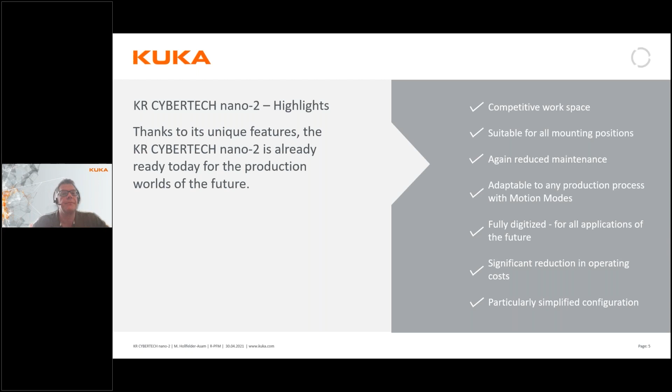One of the first improvements with the CYBERTECH nano is the fact that it is now possible to mount it in any position, not only on the floor, wall, or roof, but also in an inclined position. That means basically you can mount it at any angle you want, all with the same robot type. It's just a software setting. You mount it and tell it at what position it is mounted, and it will compensate its movement and its lubrication for that position automatically.

There is also a new power system on board. That means for the external cabling up to the tool, there's a completely new K-PIPE with much more options than we had before, in terms of what type of cabling you need into your tool. And those are deliverable directly from us and included in the warranty of the robot, of course. So that is also a big improvement.

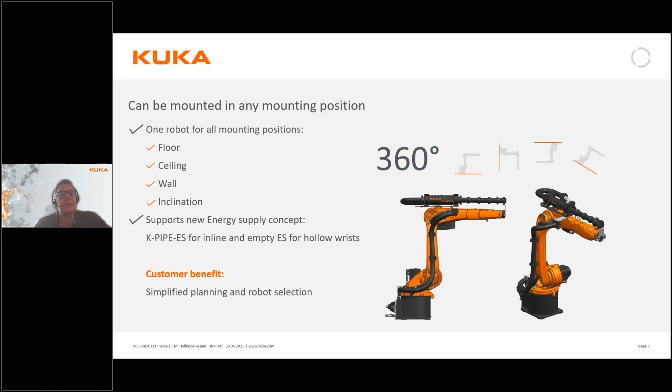Now, if we look at the CYBERTECH nano, there are 3 models. For those of you who know the KUKA robot range, you know that KR stands for KUKA robot. If we take the first one here, for example the 10, that means that the payload of the robot is 10 kilos, and we have a reach of 1440 millimeters. The Dash 2 is, of course, the second generation of the CYBERTECH robots.

In the basic range of the CYBERTECH nano robots, there are 3 robots available: the 10 kilos, the 8 kilos with the 1640 millimeter range, and finally the 6 kilos with an even longer range, a 1840 millimeter range.

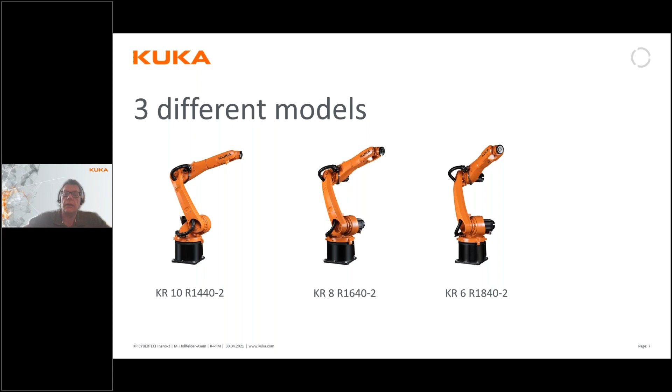The protection class of these robots is quite good. They are completely waterproof as a standard. The axis near the tools are IP67, which means that you can wash it off with high pressure water. The complete robot is IP65, which means that it's dust and waterproof. And the operating temperature that it's allowed to operate in has been widened quite a lot, going all the way from 0 degrees, meaning it can work in a cooled room, up to 55 degrees plus, which is quite a big range in terms of temperature here.

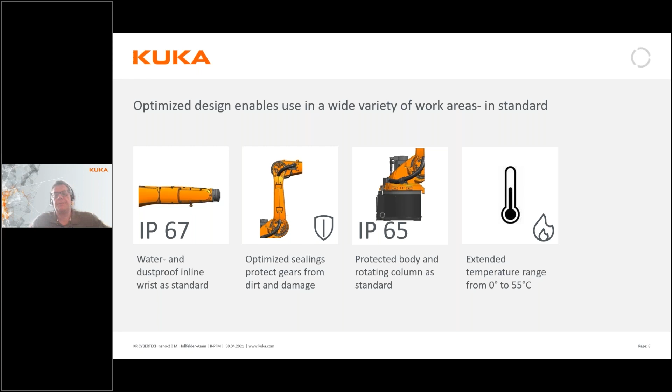Now, if we look at all these changes a little bit more in detail, we can see that the changes consist of a reduced contour around axis 2 and 3, meaning it's a bit slimmer than before and can get into tighter spaces. Optimized robot design is a very generic statement, but what it actually means is that we have been able to construct this robot out of fewer parts, meaning there are fewer spare parts needed and required for this.

The Axis 1 gearbox has been updated. There are already from the start forklift pockets for when you move the robot into position. We have again slimmed the footprint of the robot, so it takes as small a space as possible. The inline wrist solution up near the working flange is optimized for this K-pipe energy system for the cabling out to the tool you might have, and we use the same K-pipe solution as for all our robots here.

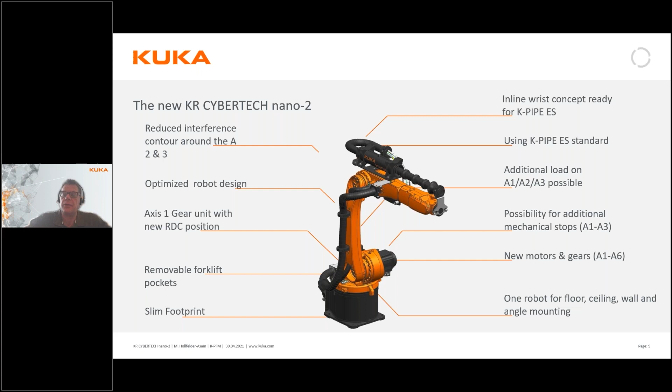Now, if we look a bit more specifically at this, what does that mean? Well, I mentioned we have already changed all the motors and gearboxes. That actually gives us increased axis speed on all axes and increased acceleration and retardation. That means the robot is now even more dynamic and we can reduce our cycle times using this.

This is all emphasized and even more visible because the weight of the total robot has gone down. That means also that we get a better path and point accuracy in the robot compared to before.

And the new drives and gearboxes also allow us to optimize the energy consumption of the robot. That means that we can bring down the cost of operation in terms of energy. And finally, as I mentioned, it is a lot slimmer than before.

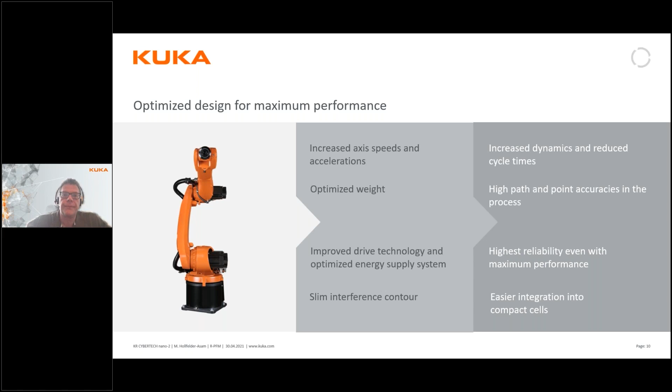The best way of seeing this is having a look at the working space of the robot. You see, it's a very small area which it can't reach very close to itself. It can even reach under itself, which means there is no need for a special console version of this robot. It can actually reach spaces under its own foot if it's sitting on a console.

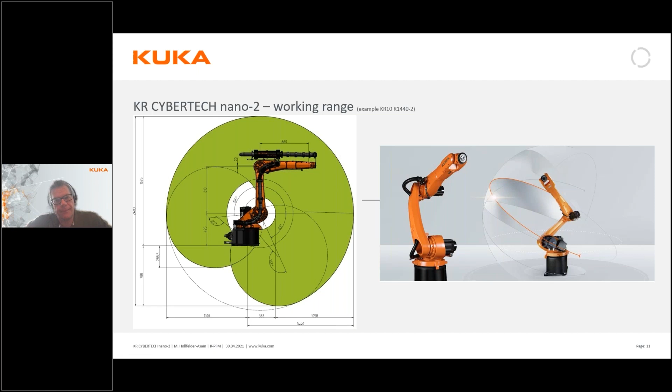I also mentioned a little bit about how in the older days we had special variants of our robots. One could be a path-accurate robot and one could be a high-speed robot. This has been taken away and is now totally controlled through the software instead, where you can choose your mode of the robot.

In the basic variant, it's called performance mode, which is the standard mode. But you can software-wise switch it to a path mode, which makes the robot travel a little bit more path accurate than it would in its normal mode. That would be typically practical when you're doing a path that requires high precision, for example a gluing or a welding path.

And on the other end of the scale, there is a dynamic mode, which actually is a high-speed mode, typically used when you want to reduce your cycle time. There's a bottleneck in the robot movement, for example.

And to emphasize this, I've brought into the webinar a small movie, which I will now show you. This movie might pop up in a separate window on your site. So if you don't see the video immediately, check if there's a separate window with the video popping up.

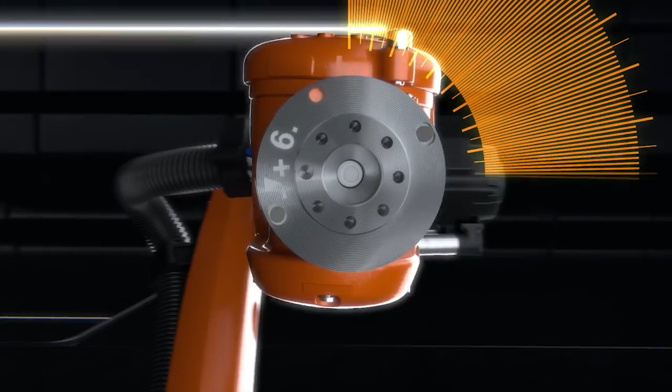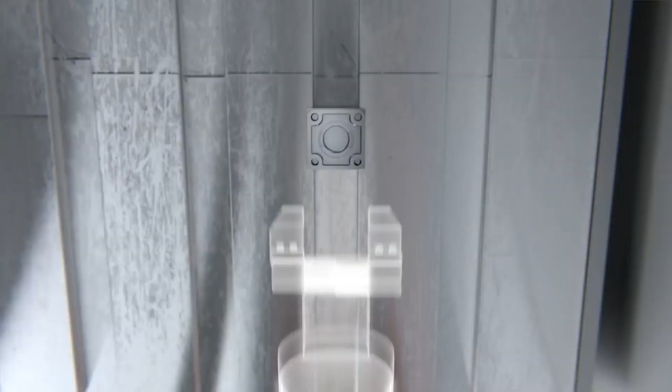KUKA is setting the standard for the low payload category. Extremely compact, utmost precision, fascinatingly fast. For maximum performance, the new KR CYBERTECH nano series. Nine perfectly coordinated robot types with maximum efficiency. Ideal power density for infinite possibilities. Flexibility in any position - on the floor, wall, or ceiling. Simply anywhere. For fast availability in changing markets with an impressive reach. Maximum precision and productivity in narrow spaces, whether for handling, assembly, or continuous path motion. We think in solutions so that you can optimize your processes. Lower costs and more profits through unrivaled reliability. 20,000 maintenance-free hours. KUKA solutions, developed and built for your success. The new KR CYBERTECH nano series. Performance reinvented. Welcome to the new generation of robots.

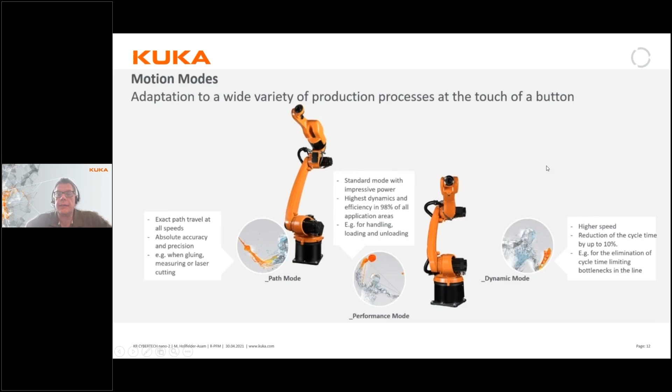So that small video basically explained a little bit about what we've been talking about so far. Now, I just said that there are 3 new robots, but that's not completely true. In fact, there are 6 different robot models.

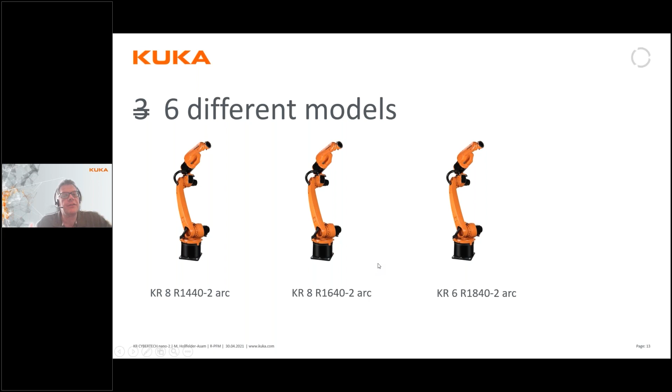And what is so special about them then? Well, they are equipped with a hollow wrist instead of the inline wrist which you are used to in normal robots. This is another design of axis 5 and 6 of the robot.

That means that a tool can actually go inside the fitting of axis 6. So you can place, for example, as we have done in the picture to your right here, a welding gun directly inside it and get a more accurate, less space-demanding installation.

And of course, we still have a full 360-degree movement of axis 6. So this is specially developed, for example, for a welding gun, but it could also be a gluing application and so on, because you now get the welding gun integrated into axis 6.

The cabling goes inside of axis 4 to the energy pack. So this is a much neater installation, which is of course important where you have tight spaces.

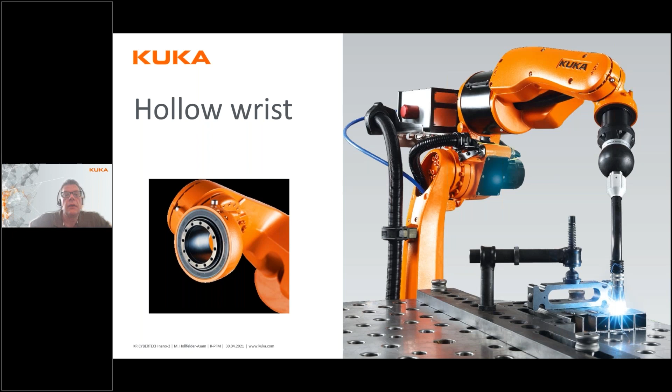And speaking of welding applications, there is a lot of software support available. In fact, there are quite a lot of software options for welding applications, with a basic one starting at what's called KUKA.ArcTech Basic.

But there's also an ArcTech Advanced option. On top of these, there are ArcSense options, which offer the possibility, for example, to track a seam with an arc sensor. There's also a special option called ArcTech MultiLayer, where you have the possibility of applying several layers of welding seams.

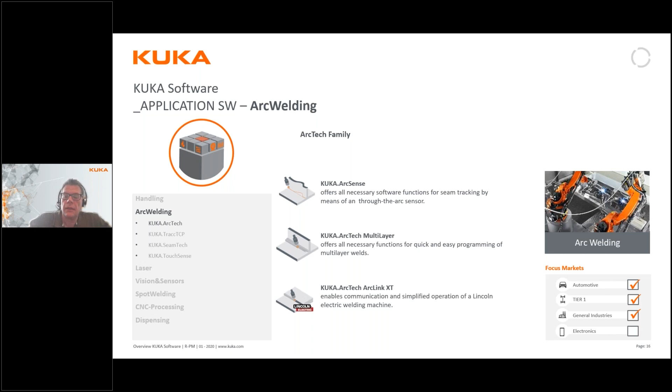And there are some options for SeamTech Finding or SeamTech Tracking, as well as options for Tracc TCP. That means that when you've cleaned your torch tip, you need to read in where the new TCP of the torch is, very accurately, to be able to start welding at the correct position.

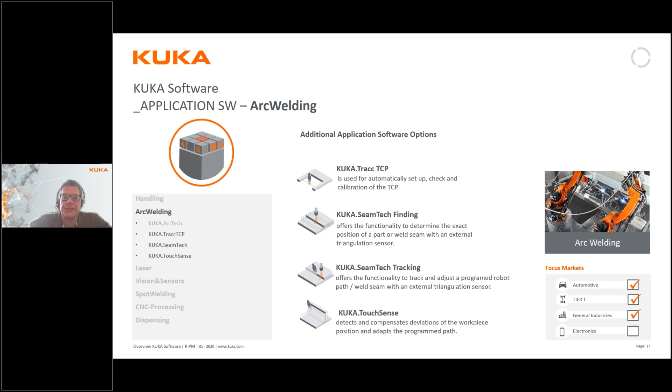One really interesting option for welding applications, I would say, is our option for Ready2_pilot. We are planning to have a separate webinar on the topic of welding, going through the welding technologies we offer. It will come at a later date, together with this Ready2_pilot option.

The easiest way to explain what this is, again, is to show you a small movie. This movie might pop up in a separate window, so if you can't see it immediately, please check if it's starting in a separate window on your computer.

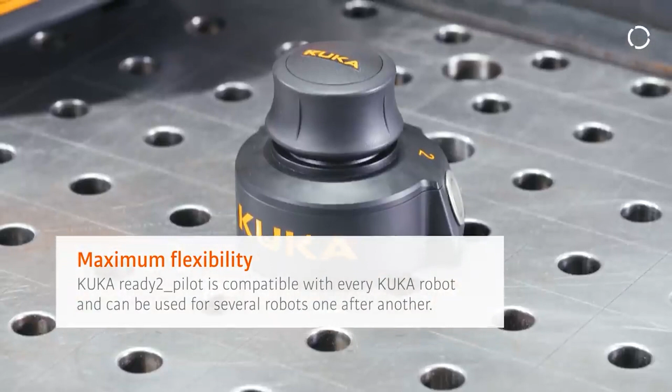Our option Ready2_pilot is typically usable by our end users. With this option, instead of programming the robot in a normal way, you can hand guide the robot by applying the 6D mouse directly on the robot, and then hand move the robot in the pattern and path you require.

This is an option extremely useful for an end user who is not typically a robot programmer, but wants to apply a new welding path, for example. It doesn't have to be used only with welding, but it requires no knowledge of how to program the robot.

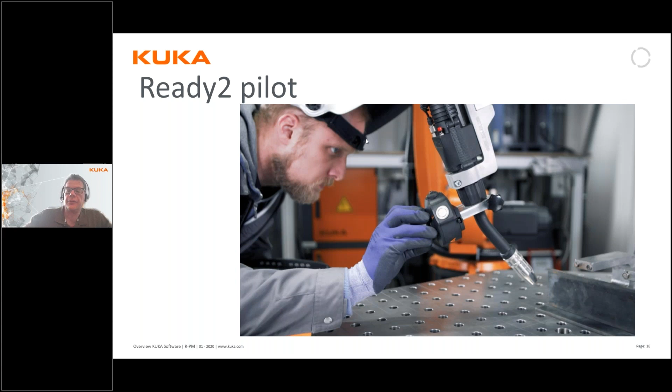Moving back to our new CYBERTECH nano robots - what we have done is lower the complete energy consumption of the robot during its lifetime. This has been done by improving the drive and the controllers to the drives. By lowering the weight, we need less energy as well.

We have also made fewer spare parts for the robot, meaning that each part is more easily exchanged if there is such a need. And we've made it possible to mount the robot in any position available.

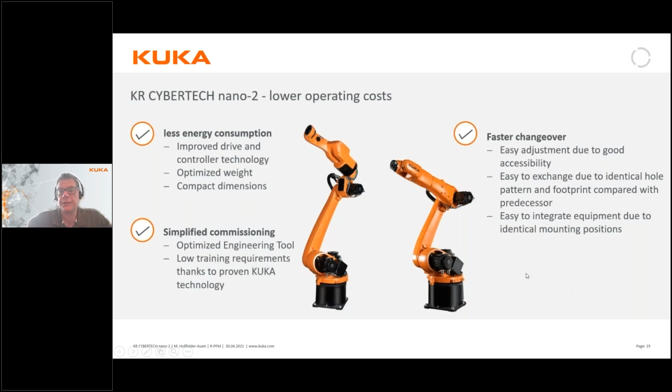We have also optimized your cost of ownership by increasing the availability of the robot. The mean time between failure on these robots is 400,000 hours, meaning the technical availability of the robot itself is actually 99.999% of the operating time.

To emphasize this further, we expect these robots will have quite a long lifetime at our customers, and we have to act accordingly. That means the spare parts for these robots are available for 25 years.

The cable sets inside are totally maintenance free and electronically shielded, meaning that during the robot's lifetime there will never be a need to exchange the internal cabling.

And on the hollow wrist robots, the arc welding robots we looked at just now, axis 5 and 6 are totally maintenance free. So this is also a huge improvement for you as the owner of the robots.

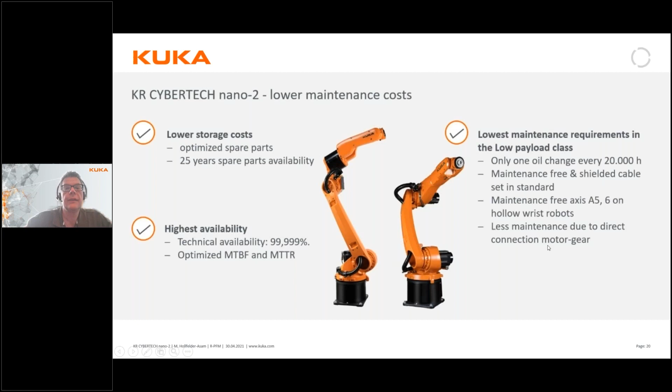The robot comes with, of course, a smart pad, as with any robot, but also our new robot controller, called KR C5. We will get back to this in a couple of weeks about what's new with our new controller generation. We have earlier talked about the C5 Micro, but we will get back in a couple of weeks to talk about the new larger C5 cabinets.

Since we are now on the new generation of controllers, we have also included the new system software 8.7 in those cabinets. And there is a webinar, What's New with 8.7, available as well.